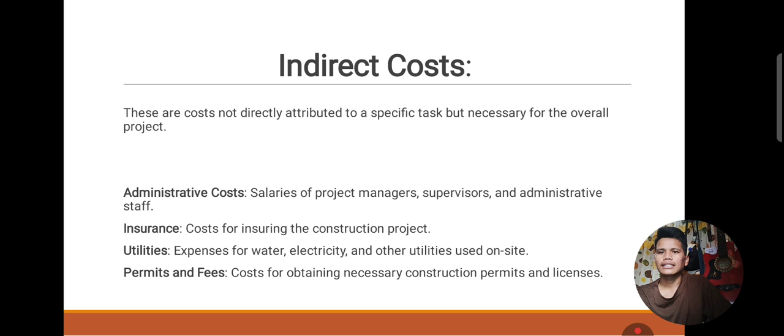Next is fixed cost. This cost remains constant regardless of the level of construction. Fixed cost is a continuous payment, whether monthly or annually.

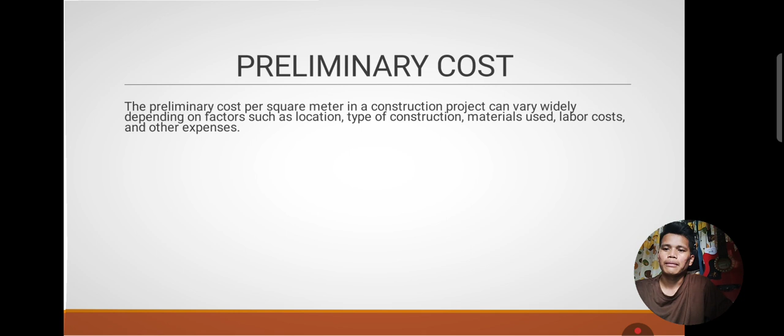There are different types of preliminary costs depending on construction. Number 1 is residential — for building a house, the cost per square meter can range from affordable to high-end finishes. Low-end construction is estimated at 15,000 to 20,000 per square meter.

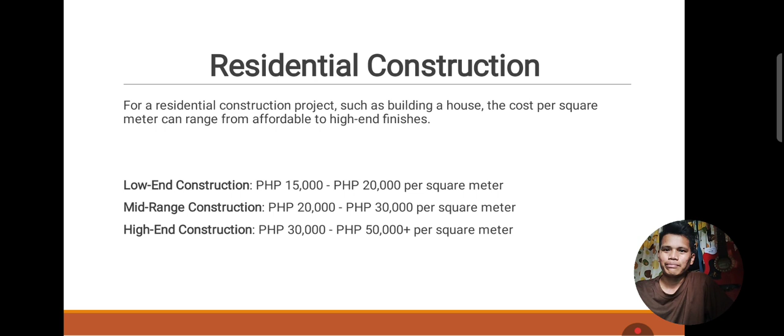The next is commercial construction. The estimate for basic commercial construction is 30,000 to 50,000 per square meter, similar to residential, but the estimate is larger compared to residential.

Basic commercial construction is 30,000 to 50,000 per square meter, while mid-range commercial construction is 50,000 to 80,000 per square meter, and high-end commercial construction varies from 80,000 to 120,000 per square meter.

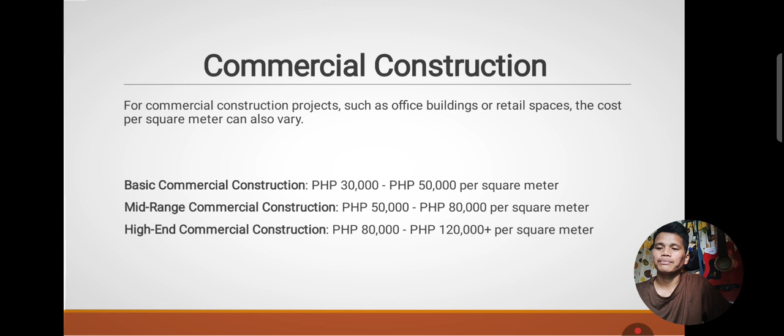And next, industrial construction. For industrial construction such as factories or warehouses, the cost per square meter can also vary based on complexity and requirements. So it also depends on the structure you want to build, whether it's luxury or just moderate design.

So for basic industrial construction, the rough estimate is 20,000 to 40,000 per square meter, for a simple house with basic infrastructure.

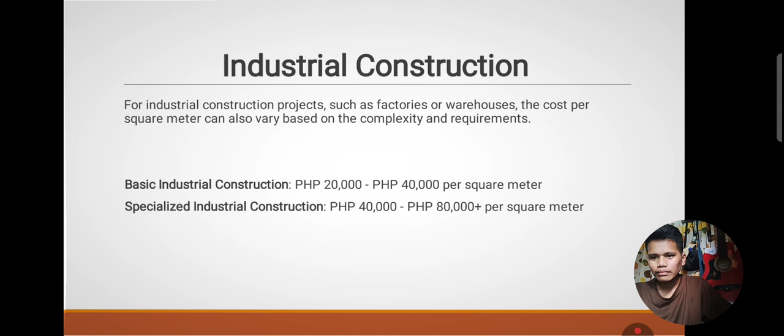Specialized industrial construction varies from 40,000 to 80,000 per square meter. An example of this is factories with special equipment and infrastructure.

Several factors can influence the cost per square meter: location, material, labor, design, and regulation. Why labor? Because depending on the location, the pay for labor also varies, and the skills differ.

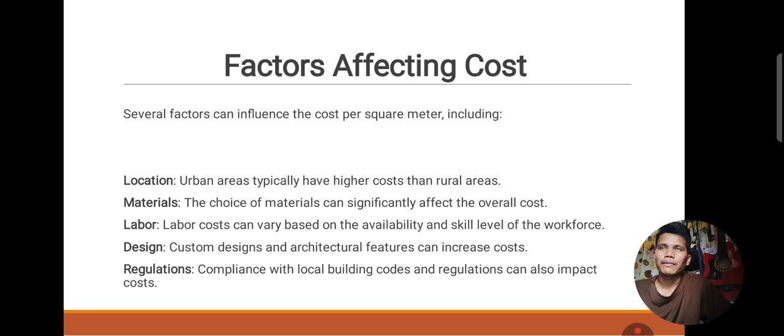Next, stipulated sum or lump sum contract. This price covers all costs associated with the project including labor, materials, equipment, and overheads.

For example, a contractor agrees to build a house for 5 million. This is what the owner will pay the contractor for the whole construction process — basically a pakyaw arrangement. In a lump sum, the owner has the contractor estimate the total cost of the house. If the contractor agrees, any shortfall in the estimate becomes the contractor's problem, since they already agreed on 5 million.

Next, unit price contract. Here, the contractor is paid based on what has been completed. For example, a road construction project may specify that the contractor will be paid 1,500 per cubic meter of concrete poured. If the project requires 2,000 cubic meters of concrete, the total payment to the contractor would be 3 million, since the agreed rate was 1,500 per cubic meter.

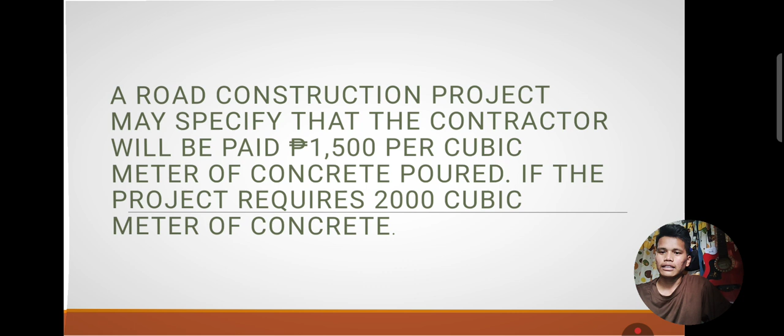Next is cost plus construction. Here, the owner pays the contractor based on the actual cost during construction plus an additional fee for the contractor's services. This fee can be a fixed percentage of total cost.

So cost plus fixed percentage — for example, if the total cost of a structure is 4,000,000 and the contractor and owner agree on an additional 10% based on the construction cost, then the amount the owner pays the contractor is 4,400,000, since they agreed on 10% of the actual cost.

For cost plus fixed fee, if a contractor's actual costs are 4 million and the fixed fee is 500,000, then the owner pays 4,500,000.

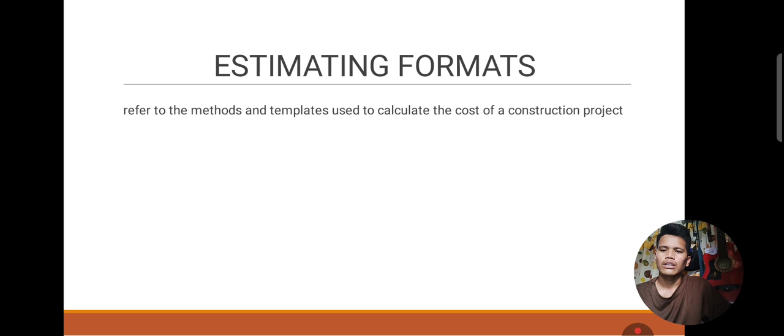And next is estimating formats. Estimating formats refer to the methods and templates used to calculate the cost of a construction project. First is the preliminary estimate, which applies a rough estimate using cost, usually cost per square meter.

Detailed estimate organizes a breakdown of all costs including labor, materials, equipment, and overhead costs. An example is an itemized list of materials with quantities and unit costs.